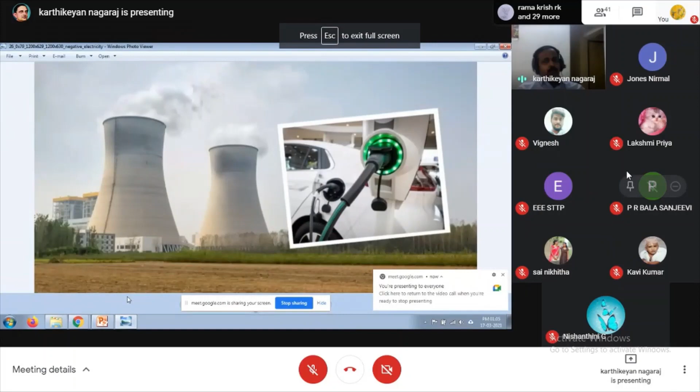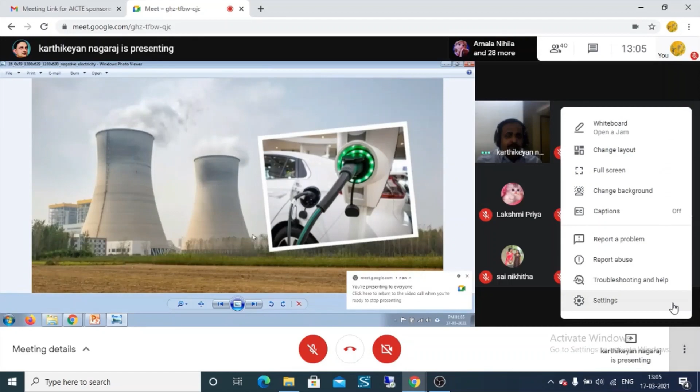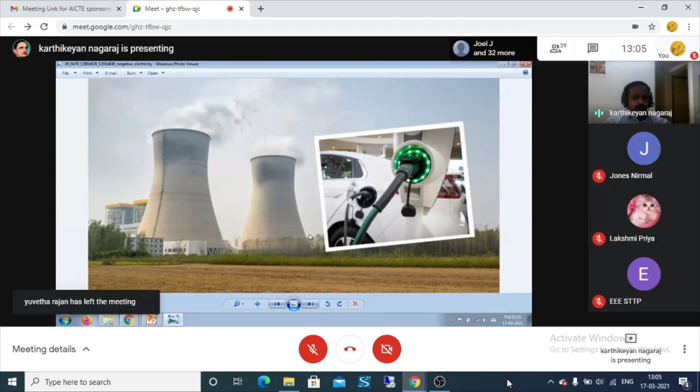So, electrical vehicles - what's the purpose of us moving to electrical vehicles today? It's not fully satisfactory because till now we are consuming power indirectly from non-renewable resources. People who are buying electrical vehicles eagerly explain that we are contributing to pollution control and sustainable development, but they are indirectly contributing to the enhancement of burning of non-renewable energy. So we must consider why we are going for electrical vehicles. This is the main thing.

Some people think the electrical vehicle is a new thing for our era, a new thing for our generation. But that is not true. The race started for both gasoline vehicles and electrical vehicles at the beginning. But temporarily, the normal vehicle, the IC engine vehicle, led in the competition. Till today they have the leading role in transportation, but the race started from the beginning. Both vehicles were on the same platform to start their life, but temporarily, for nearly 100 years, the electrical vehicle went back.

But today, a new type of lifestyle is going to come - the electrical vehicle era. So let me show one introduction video - how the electrical vehicle first dominated life, then temporarily was not able to dominate transportation, and finally how it returned back to the competition. Let me show one simple introduction video.

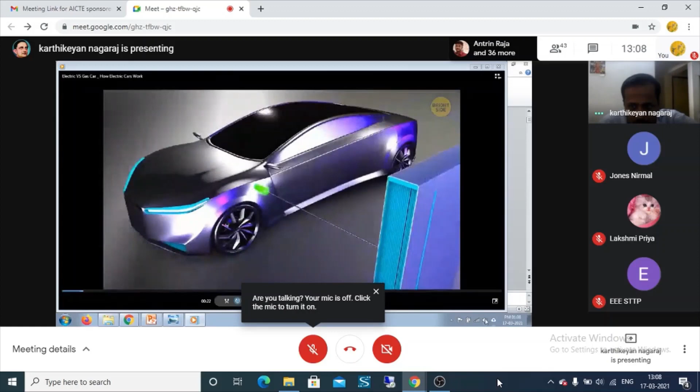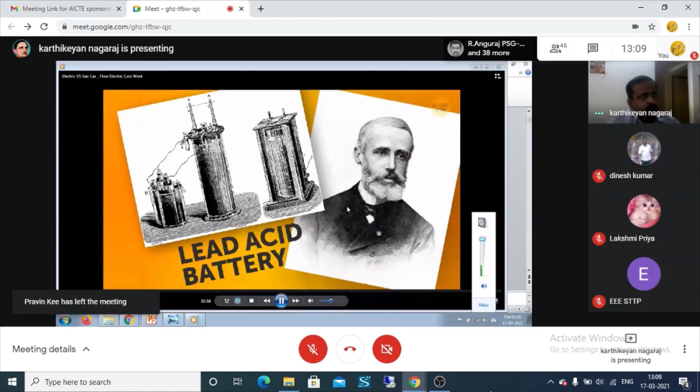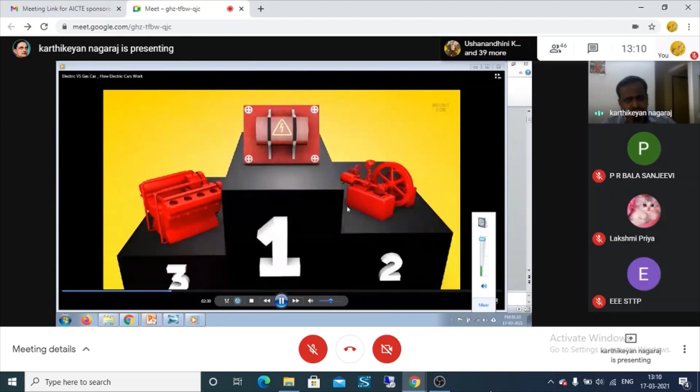You'd probably be surprised, as I was, to find out that electric cars aren't a 21st century invention. Electric-powered motors came out at pretty much the same time as petroleum-driven engines that run on fossil fuels like gas and diesel. Almost 2 centuries ago, in 1828, a Hungarian engineer named Anyos Jedlik invented the first prototype of the electric motor and used it to power a small model car. In 1834, blacksmith Thomas Davenport created a similar device that could be driven short distances using an electric track - think streetcars later on. In the Netherlands, university professor Sibrandus Stratingh built a tiny electric car powered with non-rechargeable batteries. Even though the idea of a battery-powered vehicle was to revolutionize people's lives, primary cell batteries weren't the way to go since they needed too many batteries to run the motor over long distances at low speeds. In 1859, French physicist Gaston Plante invented the lead-acid battery, which changed the electric engine game for good. Many countries began producing electric three-wheeled cars until the U.S. made a breakthrough: in 1891 they created the first electric vehicle, a 6-passenger wagon that could go up to 14 miles per hour - major back then. After that, people were thrilled and the electric car market thrived. In the late 1890s, electric-powered taxis filled the streets of London. At that time, electric cars had many advantages over steam-powered and gas-guzzling engines: they didn't vibrate, didn't give off that awful burning gasoline smell, and didn't require much effort to start. By the early 1900s, almost 1/3 of cars in the U.S. were electric-powered.

But that wasn't going to last for long. By the late 1920s, infrastructure in the U.S. had improved significantly, and vehicles needed to go further more efficiently. So fossil fuel cars took the lead because they got the job done.

The top speed that electric cars could achieve was 15 to 20 miles per hour, about how fast you can go pedaling on your bike. Another problem was that electric-powered engines back then could only travel 30 to 40 miles on one go, which means they'd need charging every couple of hours.

And things were about to take a turn for the worse, along with the improvement in infrastructure. That's when the electric starter was invented, and gasoline cars began using it alongside mufflers, which made their noise a lot more tolerable. Electric cars took their final hit in 1910, when Henry Ford began his mass production of gas-powered vehicles, which made them ridiculously cheap, whereas electric cars cost a lot more.

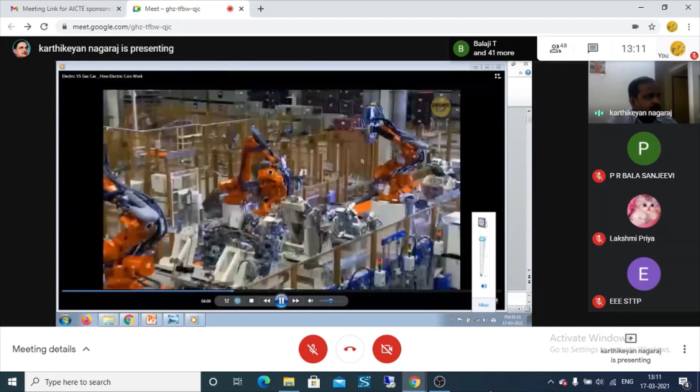Companies then realized that there was no room for electric automobiles on the market, so they stopped producing them altogether. Fast forward to the 21st century. We now have advancements in technology and a greater concern for the environment. Add a fear of running out of resources to fuel our vehicles, and it's no wonder automotive companies have decided to give electric cars another chance.

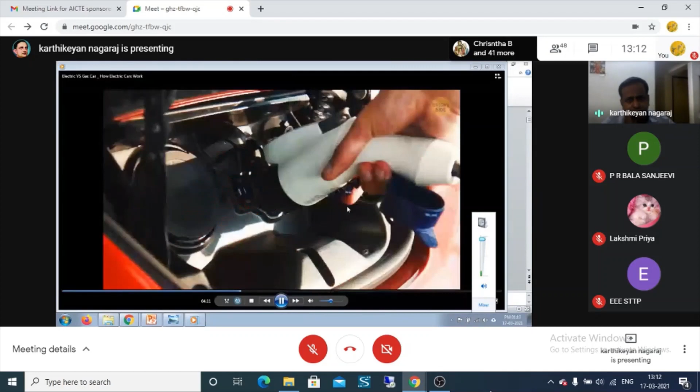The main difference between electric and fossil-fueled cars is that the e-cars can use a variety of renewable resources to generate their electricity. In fact, the science behind the electric car is surprisingly simple. Its basic principle is the alternating current, for which we have Nikola Tesla to thank more than a century ago.

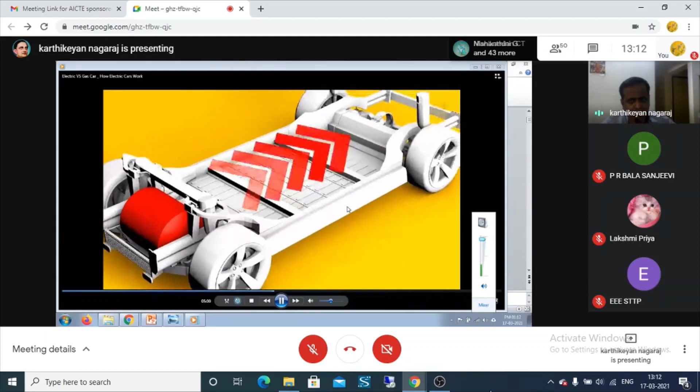Before you understand the science behind that, let's back up and first cover the differences between direct and alternating currents. That's DC and AC for short, or AC/DC if you're into hard rock. An electric current is the movement of an electric charge that carries electrons. An engine, for example, can be powered by direct current, which means that the electrons flow in one direction only. For most things that run on DC, that's from the battery to whatever it's powering.

The electrons that move along an alternating current, on the other hand, periodically and consistently change direction. It's pretty much all the electric power in your home, from your microwave to your game console. In short, if you could look at the two types of current on a graph, direct would be a flat line, and alternating would have regular uniform waves going up and down. Or to put it even more simply, DC would be like water running out of a bucket with a hole in the bottom. AC would be kind of like watching the water swish around back and forth if you open the lid of your washer and look inside.

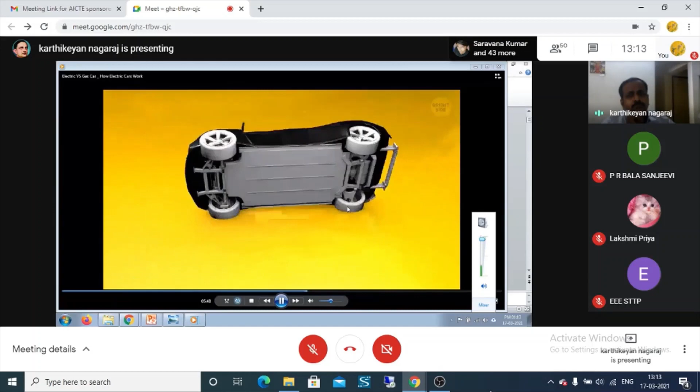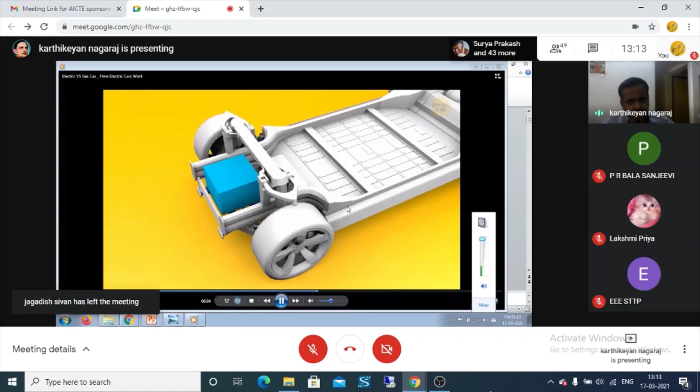Okay, enough of that. So what about electric cars specifically? Well, most of them convert the direct current electricity from the batteries into an alternating current. Since electric cars don't have an internal combustion engine like gas-powered vehicles do, they use their space quite differently. You'd normally expect a big, bulky battery to be in the front under the hood, but it's completely different in electric cars. They have 7,000 lithium-ion batteries that sit under the flooring.

This battery pack has a longer lifespan and a higher power density, which makes them ideal for powering a vehicle. But one of their vulnerabilities is overheating and thermal breakdown. That's why electric cars have coolant running between them to prevent overheating.

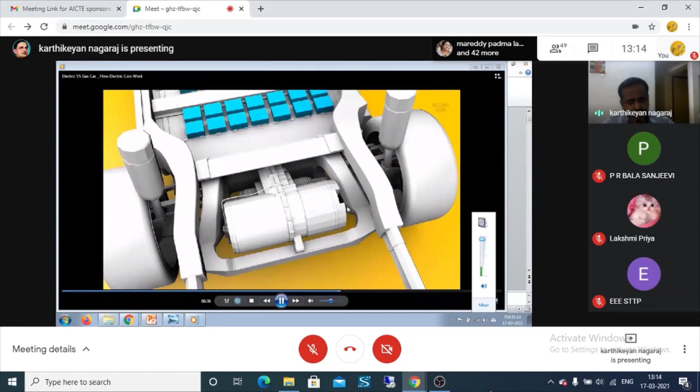And there's all kinds of interesting stuff at the back of the car. That's where you'll find the inverter, which is what converts that DC into AC and gives power to the engine. But it can't do that without the induction motor. It's also in the back, and it takes the alternating current that just came from the inverter and creates a rotating magnetic field that causes the motor to turn.

Now, electric cars don't have a gearbox or lever, and all of them are automatic. They have a single-speed transmission that sends power from the induction motor to the wheels. This is how the electric motor transforms electrical energy into mechanical energy, that is, the physical power that turns the wheels and sends you on your way.

But here's where it gets even more interesting. When you accelerate while driving, the car uses more energy. But when you brake, the energy is transformed into electricity through the induction motor. Then, that electricity travels all the way back to the battery pack and is stored so you can use it later.

Now that's efficient. An electric car gets juiced up by being plugged into an outlet or a charging station, and they use 3 main levels of charging. The first level is the basic charging you can do at home. It uses an outlet of 120 volts and adds 2 to 5 miles of charging per hour.

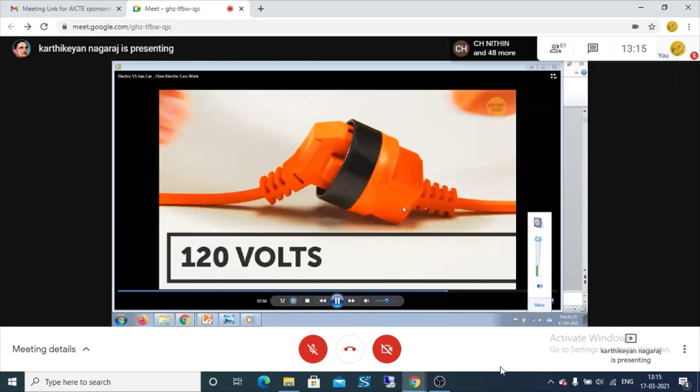Then there's the second level. It uses electric vehicle supply equipment and has a higher voltage, 220 to 240 volts, to add 10 to 25 miles per hour of charging.

Finally, the third and most efficient one is the direct current charging station, which does exactly what it says. It uses direct current to add up to 80% of the car's battery storage in less than half an hour.

The cost of charging an electric car is dirt cheap as well. It'll cost you less than $5 to fully charge your electric vehicle at home, and you can get up to 150 miles on one charge. That, of course, depends on the size of the battery. Bigger electric cars with bigger batteries can cost up to $15 to fully charge, but they can cover up to 300 miles. Ooh, where do I sign?

Now, electric cars are less expensive to run and maintain if we compare them to fuel-powered vehicles. But there's no denying that the car itself comes with a much higher price tag. But still, according to a recent study, the average operating cost of an electric car is $485 a year, whereas a fossil fuel automobile is $1,117. So that higher initial price should pay itself off over time.

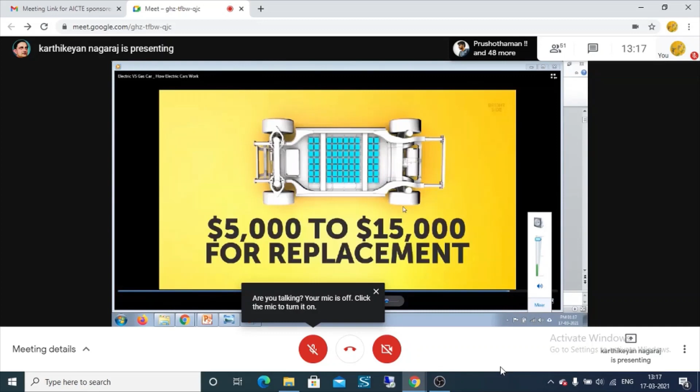But there's still another problem. One of the most expensive components of the electric car is its battery pack. It'll cost you an arm and a leg to replace it if it breaks down. Expect anywhere from $5,000 to $15,000 for replacement. But most electric car manufacturers give the battery at least an 8-year warranty for up to 100,000 miles, if that makes you feel any better about purchasing.

The good news is that we're seeing a huge movement toward electric-powered vehicles as a strategy to tackle fuel emissions and reduce pollution. The head of automotive research in Europe predicts that by 2025, all cars in Europe will be totally electric or at least hybrid. And many countries are setting goals to lower their fuel emissions in the next few years. So, who knows? Maybe sooner than later, we'll all be zipping around in electric cars and gas guzzlers really will be a thing of the past.

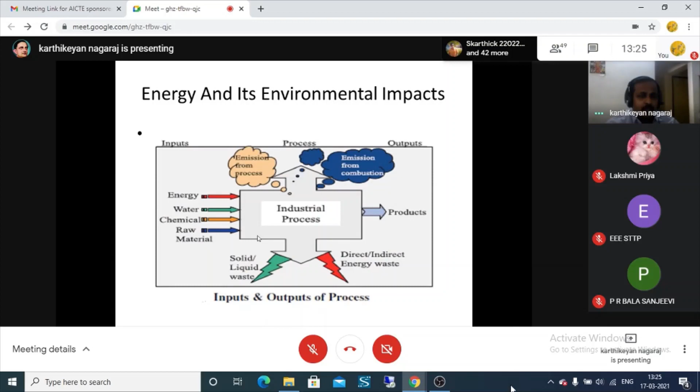So the greenhouse effect - this is only because of burning fossil fuel. While burning fossil fuel, ultimately we emit sulfur. Did you imagine I am using an electric vehicle? Then there is no emission. But the problem is that while using an electric vehicle, you charge it.

The EV charging generates electricity from coal. While burning coal, ultimately sulfur comes out, and the sulfur affects the atmosphere. Due to that, a high amount of carbon dioxide and carbon monoxide is emitted, particularly from transportation vehicles.

Yes, because most people today use either public or private transport, and they use fossil fuels. Burning fossil fuel emits carbon monoxide. The amount is high because in the city side, the density of vehicles is very high, but in rural outer areas it's different.

The roads are very low there, that's why the density of vehicles is very low. Due to that, it dissolves in the atmosphere. But in the urban area, in the dense city, we have a greater number of vehicles which give off carbon monoxide that affects the total environment. Due to that, we have more greenhouse gas emission and high carbon.

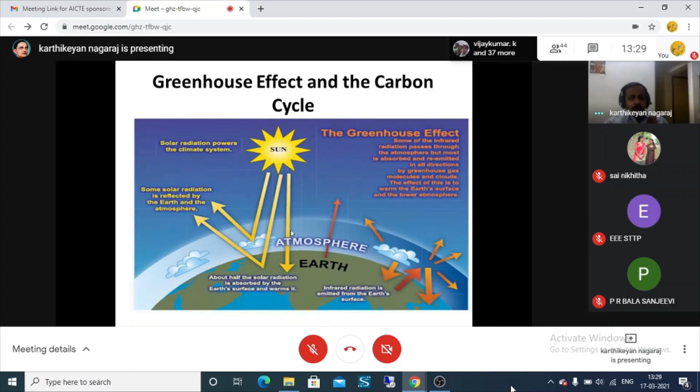Due to that, the government have promised to reduce carbon emission and increase oxygen production. There is only one country which has a good carbon rating, that is Bhutan, our friendly nation. Bhutan has very low carbon emission because it is a small country. They did not bother about GDP. They are not a democratic country, it's a king-ruling country, so they are interested in people's happiness rating. So they did not include such industries in their country. Due to that, they have less carbon emission, so Bhutan has a good carbon rating.

So ultimately, while we are using normal electrical generation from coal, that will lead to acid rain formation, because while burning coal, it produces sulfur dioxide. Once it mingles with H2O, we get H2SO4, a kind of acid, sulfuric acid. The percentage of sulfuric acid present in rain is very low, only 0.01%, but that will damage the pH value of the soil.

Every soil has a pH value. Once it reaches the acidity level, it will damage the microorganisms. Once the microorganisms are reduced, the plant cannot get nitrogen. Due to that, the growth of the plant will be reduced. So this is not directly reflected in life, but slowly it will show the result.

Global environmental concern: due to the rise of high amounts of carbon dioxide, carbon dioxide has the characteristic of absorbing heat from the sun. So it also increases our atmospheric temperature. Due to that, we have more environmental impact.

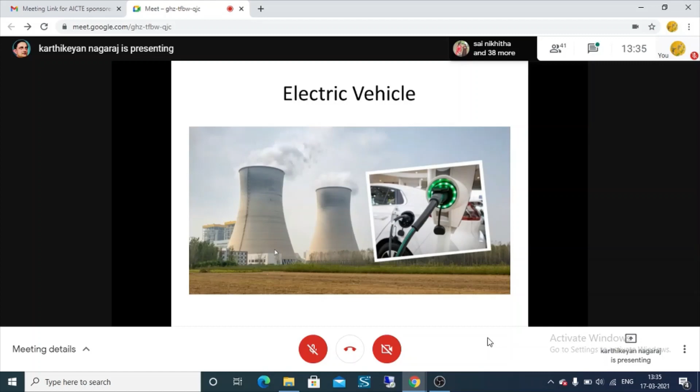So then fuel cells. Moving to fuel cells is also one of the methods, but we are still going through fossil fuel, because today the hydrogen generated is mostly 80 to 90% from fossil fuel, especially natural gas. Natural gas is nothing but methane dug from the ground, a combination of hydrocarbons. They extract hydrogen from the hydrocarbon and store it in the tank.

So due to that, they are extracting hydrogen from hydrocarbon, and the balance is carbon dioxide. So ultimately no goal is achieved, because industries are releasing tons and tons of carbon to the atmosphere by separating the hydrogen. Some countries are planning to dig the carbon dioxide into the deep sea, but it is not an economic solution.

So for the fuel cell vehicle, it is one of the well-advertised vehicles, competed by many companies. But the problem is, what is the current scenario? How much hydrogen is produced from renewable sources? We can segregate that - the hydrogen generated from renewable energy is nearly 4% only.

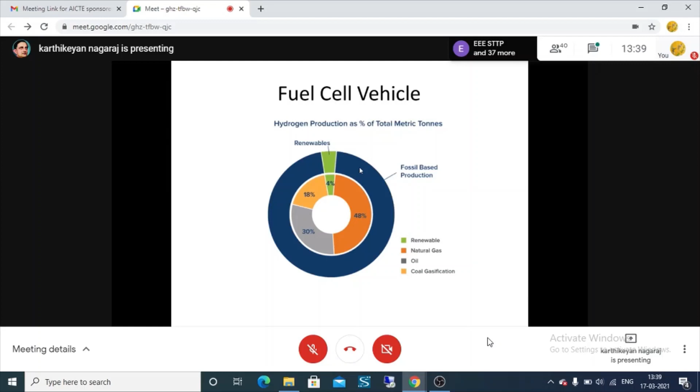From electrolysis or other methods, it is not economic. Hydrogen production from non-renewable energy is economic today. Hydrogen production is not a new thing for our community - they are producing more hydrogen for fertilizers, especially ammonium and some resins.

What is the purpose of ammonium? It is the main product, the main fertilizer for crops. Another thing is strengthening of steels - by pumping hydrogen, we are strengthening steels, and it is used for annealing and forming gas.

Another important use of hydrogen is in power generation stations. Hydrogen cooling is one of the important methods for efficient cooling. Even though it may be dangerous, it is a very efficient cooling method. Previously we used demineralized water. Then general industries like semiconductor industries, propellant fuel and gas production, glass production, hydro generation, and cooling of generators.

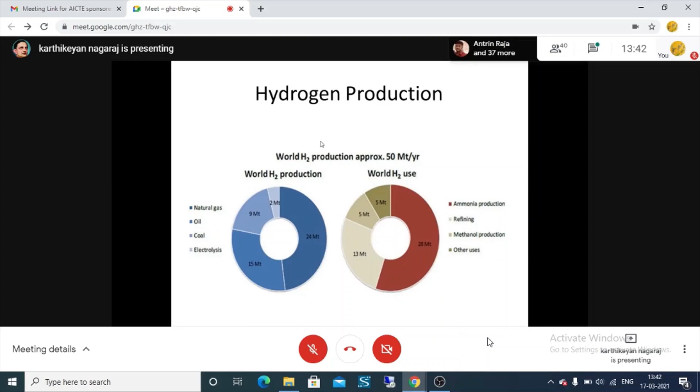Then today's scenario of hydrogen usage - more than 28 million tons of hydrogen is used for producing ammonia, 13 is for refining, 5 is for methanol production, and other uses, only transportation will occur.

So which type of hydrogen production is good for the environment? Once the power is produced from renewable energy sources - that is by using wind energy conversion, another thing solar power generation - then using the electrolysis method, power electrolysis method, and producing hydrogen.

So some people ask why India did not implement this method, because of the surplus production of power. Some countries have high installed capacity of renewable energy - for example, they required only 5 megawatts of energy, but they installed 10 megawatts in the solar panel. That country can have 5 megawatts of surplus energy in production.

At that time, they can move towards hydrogen production by using that surplus energy. In India, surplus is not a word used particularly in power generation. We did not move to that concept, because till now we are producing under our requirements, nearly under our requirements. So once we reach a surplus amount of power by using renewable energy, then only we can think about conversion.

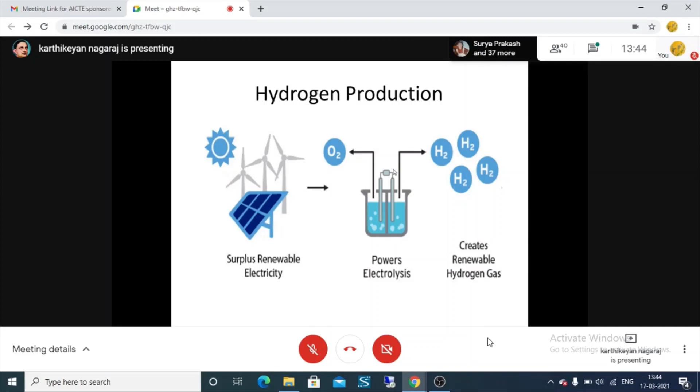Then the supercapacitor. The supercapacitor is one type of capacitor, but the thing is, supercapacitors have high energy density. Compared to the normal capacitor, it has high energy density, high power density, high capacitance, and a longer life. So here I'd like to include one thing.

In our college, our students are implementing solar operated vehicles. They are using an electric motor to run the vehicle, and ultimately we have regenerative braking. The regenerative braking occurs for a short time. We are using a lead acid battery, and the charging speed of the lead acid battery is not so high, so we cannot harvest the power generated from that regenerative braking.

So the students are implementing a capacitor as temporary storage. We estimate the power generated in the regenerative braking, and it stores the energy temporarily in a high storing capacity capacitor. After that, the DC to DC converter will slowly charge the lead acid battery. Due to that, they are able to consume the power from the regenerative braking, even though I am using slow charging batteries. So this is a temporary solution.

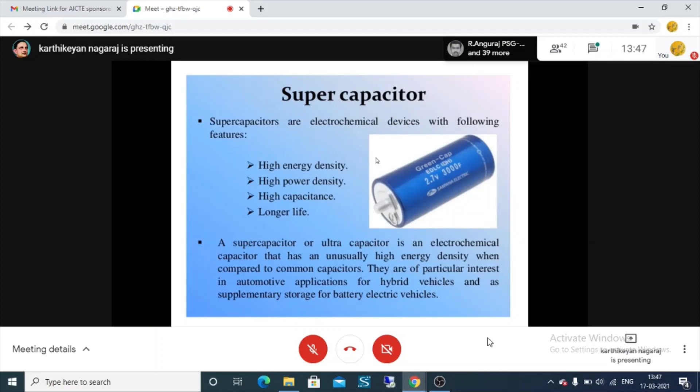So we are moving towards supercapacitors, which have high energy density, high power density, high capacitance, and longer life. The supercapacitor is otherwise called an ultra capacitor. It is normal like a capacitor, but the thing is, it has high energy density.

The world is not only going along with lithium ion batteries, they are also researching the ultra capacitor. Once the ultra capacitor is successfully installed in electrical vehicles, and the cost comes under the normal range, the world will simply drop lithium ion batteries and move towards the ultra capacitor. Because if that happens, it becomes like our normal fossil fuel, petrol or diesel vehicle — however many units you require, they simply charge your vehicle very fast.

So these are the things we have discussed. Now let me move to why we are looking at the electrical vehicle. Because our motto is to charge the electrical vehicle by using solar — that is our main motto.

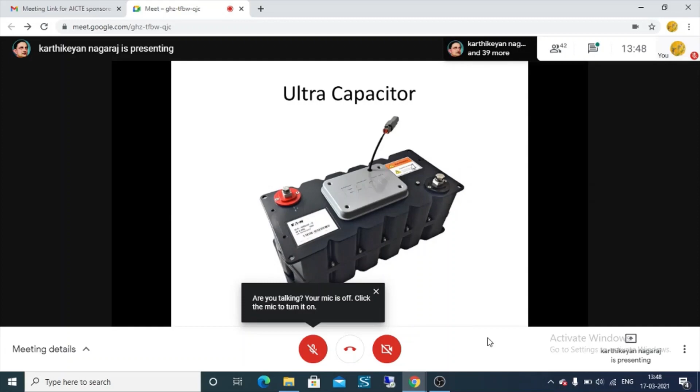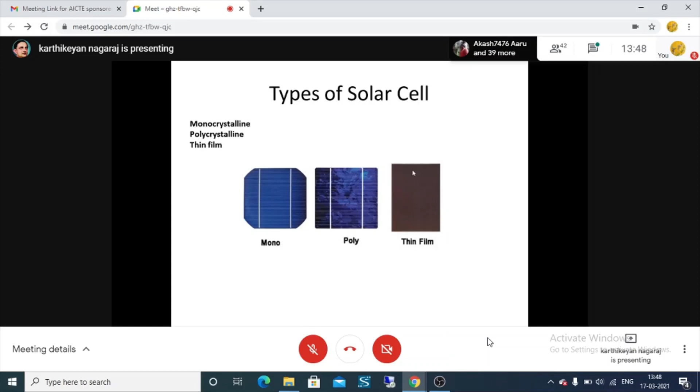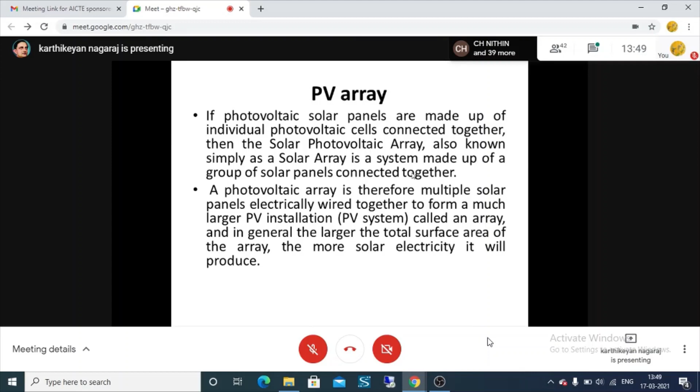A single cell produces a small voltage, but in the panel we have a series-parallel combination of PV cells that produces one normal voltage — it may be 12 volts or 6 volts with 1 amp. This is connected in series-parallel combination as a PV array, so we get a high amount of voltage with the required current rating. In our topic, let's imagine a 17 or 18 kilowatt-hour solar panel for charging the electrical vehicle.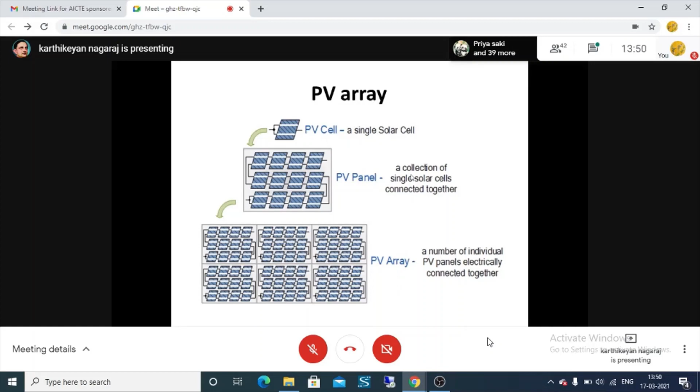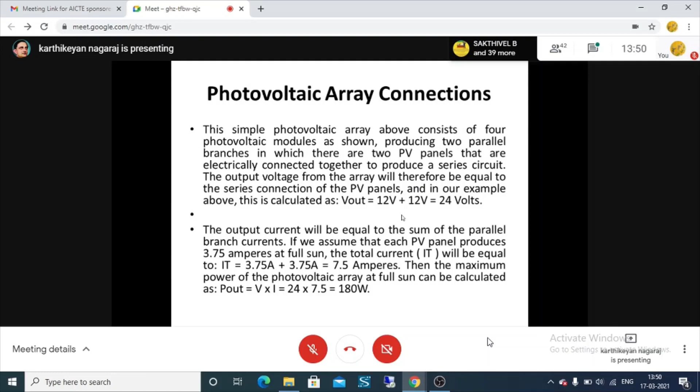So connections. When you connect in series, the voltage will ultimately be increased, same like your batteries. For example, we are using normal mercury batteries, that means 1.5 volt. When connected in series, the voltage is doubled or added. While connecting in parallel, the current will be increased.

For the photovoltaic array connections, we require 24 volt, and for the current rating, if we need a high amount of current, we increase the parallel strings. While we increase the series strings, the voltage starts to increase. Increasing the parallel strings means the current starts to increase.

So the problem is, we are using 4 different panels in 4 different places. For example, if a bird is sitting on one panel, what will happen? A bird, nearby obstacles, a high amount of dust particles, or a shadow of a nearby tree falling on one particular solar panel - what will happen?

Because due to the fall of shadow, which may happen for any reason, the voltage will be reduced. Once the voltage is reduced, it will ultimately reduce the internal resistance and internal current flow, but it will affect the rest.

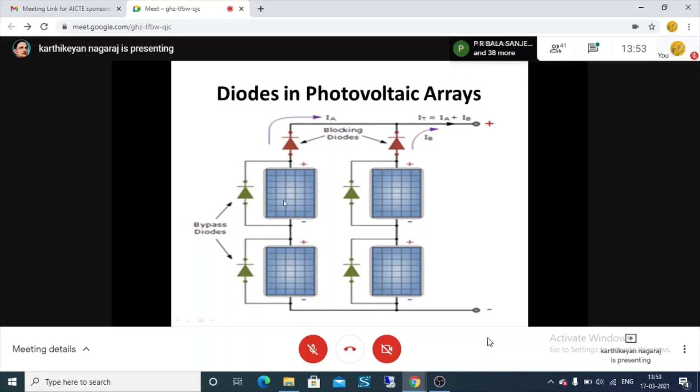That can be eliminated by using a diode - a bypass diode. Suppose this panel has proper sunlight, there is no issue. If the panel is not able to get proper sunlight, at that time the bypass diode will secure the panel by bypassing the current through the circuit. So that is the bypass diode.

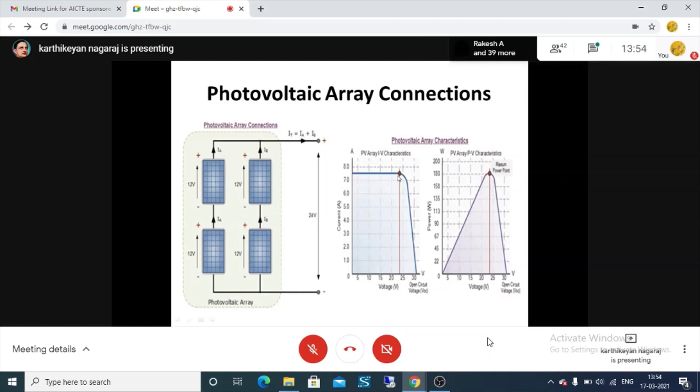So we are interested in harvesting more power. How to track more power? Here we have the PV, that is photovoltaic array characteristics. First we must take the IV characteristics and PV characteristics. The higher point is taken as the maximum power point area, so we get the term called MPPT, maximum power point tracking. This is an algorithm to get the maximum amount of voltage and current from the particular solar panel under all conditions - that is MPPT, maximum power point tracking in the photovoltaic system.

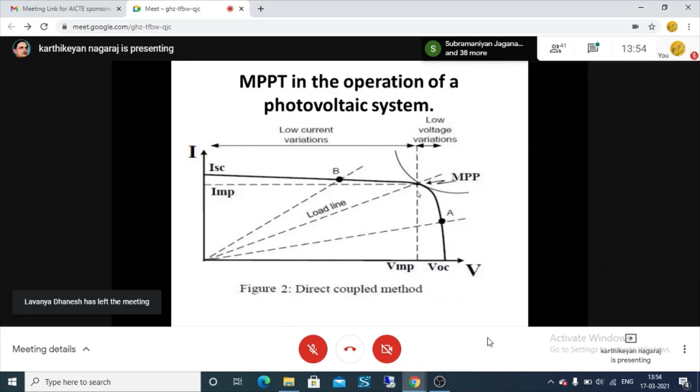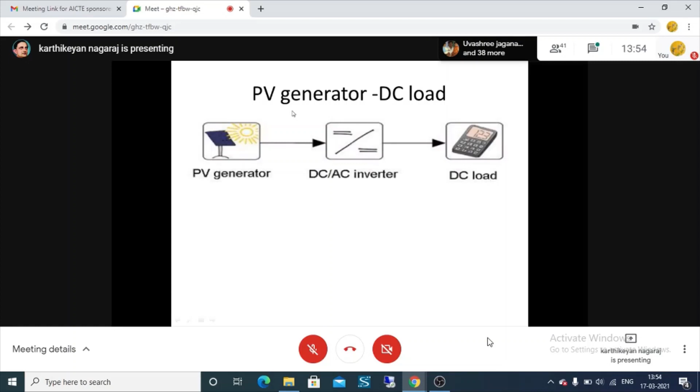So we have different applications, let me imagine. Here we have a PV generator producing power from the sun, and it is given to the DC to DC converter, then given to the load - here the load is the electric vehicle. Otherwise, the PV generator is given to the inverter and then to the AC load. So AC load is also a vehicle, because today the electric vehicle can accept low voltage AC, high voltage AC, and direct current.

For example, in our home, in India, we have a home voltage of 230 volts. So it accepts the AC voltage and converts it into DC, then it is given to the charger circuits. In the charging stations, when you go to the charging stations, the station has high power capacity converters, which can manage high power charging current.

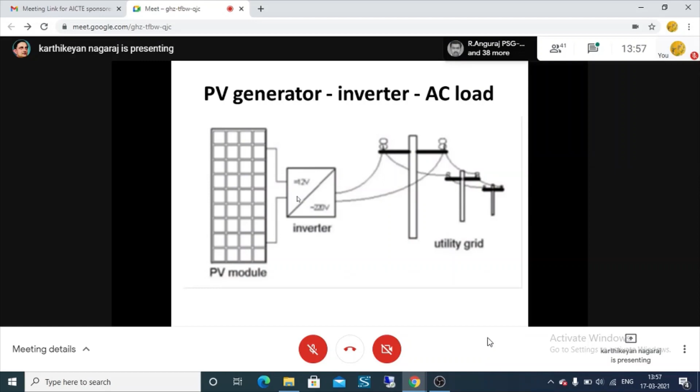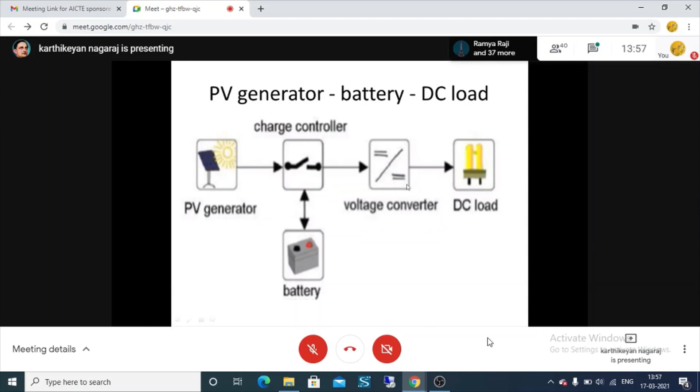So here the AC load is also used as fuel in an electric vehicle. So we are using batteries. Here we have the PV generators, and here we have the station, we have temporary batteries. Then it is converted and given to the DC load, that is the electric vehicle.

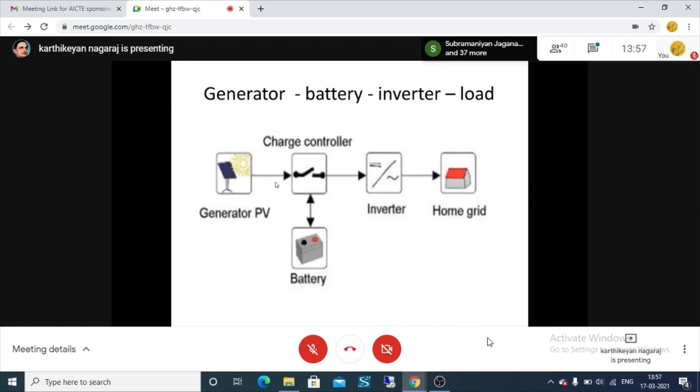Suppose the generated power is more than our consumption. It is given to the home grid.

So come to our main purpose, the solar carport. This is nothing but a solar panel used on the roof of our carport. This method is applicable for a person who has a car for transportation from home to their working company.

That is our consumer. I am not discussing commercial vehicle owners. I am the person using the electrical vehicle. I have one home and I have parking space at the company, so I am talking about that small group of people. I am not discussing commercial people.

For example, call taxis or commercial transport vehicles like buses - this thing I am not discussing. I am a person, I have one electrical car, I have a home, I have parking, and I use the electrical vehicle to travel to my office, and the office also has a park. There I am implementing the solar carport.

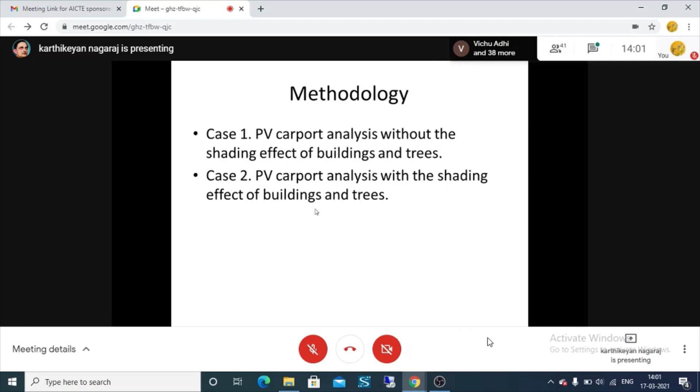Then case 1: let me take 17.3 kilowatt power as a solar panel available for calculation purpose. Here we are using 54 photovoltaic modules used in MATLAB at 180 degrees for the sun rising angle - that is, an azimuth angle facing south and a 30 degree slope angle according to the geographical location. This value is taken to get more power in our campus.

So case 1, this is 17.3 kilowatt power - how can we implement this in MATLAB? Because we are taking the sunlight level using a lux meter, every day they take the value using the lux meter, and from that we calculate the irradiation level. While implementing the irradiation level in MATLAB, we get the output power.

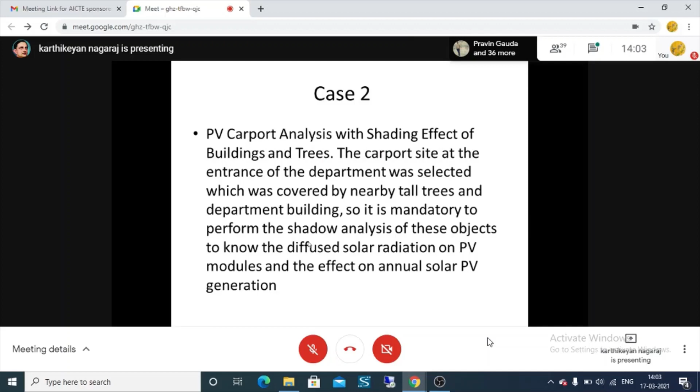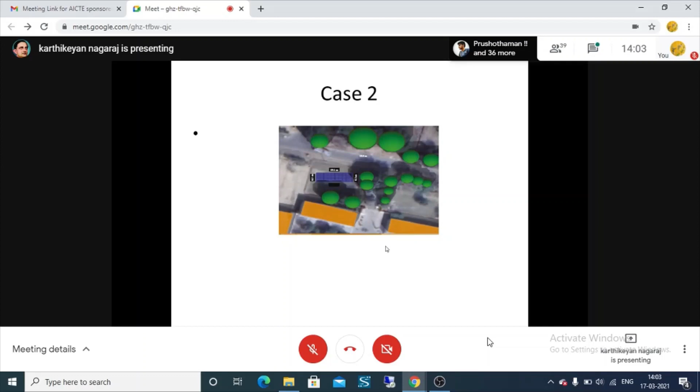So case 2, with the shading effect - ultimately we have a difference. This is just an imagination, due to the shading of buildings and trees nearby.

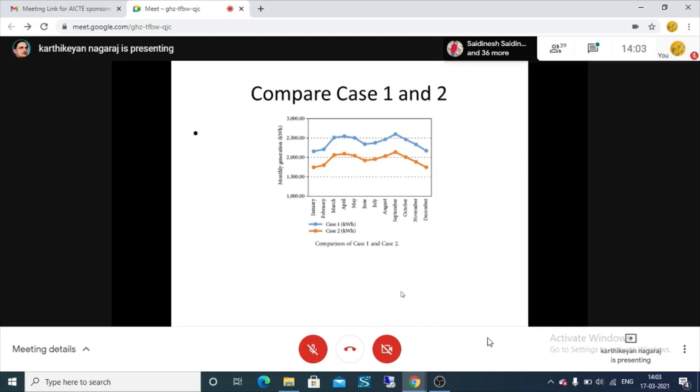Due to that, we can understand case 1 has a leading role, but it is not practically available, because the car parking present in the office may escape case 2, but in our home, ultimately trees and building shadows may fall on the roof.

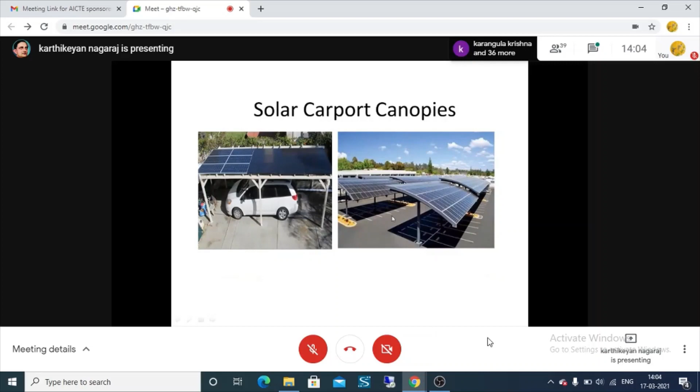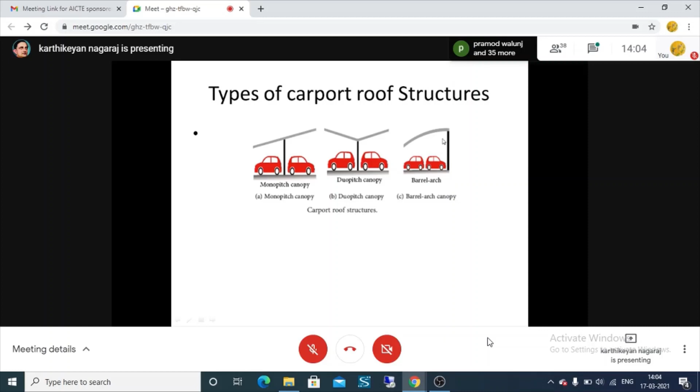So types of carport - we have 3 different carports: mono pitch, duo pitch, and barrel arch. The barrel arch we have already seen. Mono pitch and duo pitch are quite good compared to the barrel arch. For the barrel arch, we need to order a separately designed solar panel.

So we compare this with duo pitch. This is also lightly similar to the duo pitch, and this also gets our output. We compare the 3 things, and mono pitch is the efficient one when compared to the other designs.

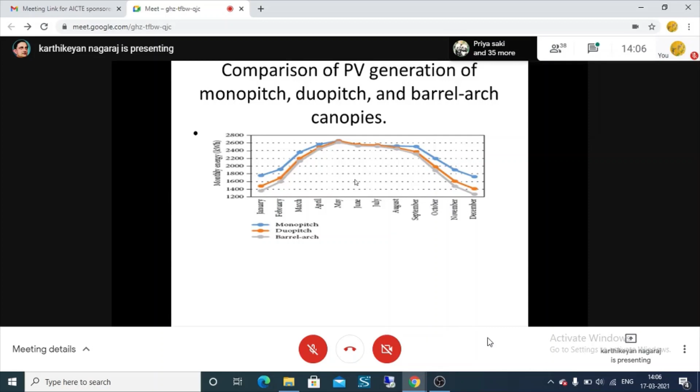Mono pitch is nothing but using slanting. The main advantage is that the heat absorbed from the sunlight is also escaped due to the slant construction, so the heat goes out naturally.

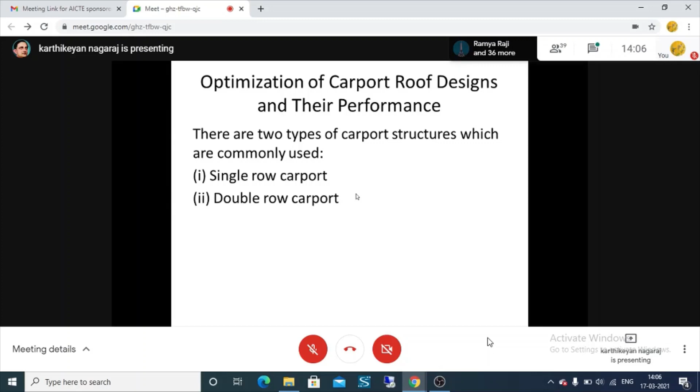Another thing is which type of carport roof design is preferred: single row car roof or double row. Double row is the efficient one because compared to the single roof, in the double roof we are using only a single pillar.

So for configuration of the PV standalone, we are using mono or duo or barrel type or barrel-arch type. The panel is producing the electrical energy, and that electrical energy is converted by the DC to DC converter, then it is given to the control center.

The purpose of the control center is to charge the electrical vehicle, using the balance power. Suppose I designed my panel to charge 3 vehicles at a time, but after some time there is no vehicle available, for example only one vehicle is available at the charging station. Now the balance power is returned back to the supply.

Second thing, suppose it is a morning period or a cloudy time in the sunny region. Due to that, the solar panel cannot effectively produce electric power. So at that time, the power is harvested from the grid and given to the control center, which then charges the electrical vehicle.

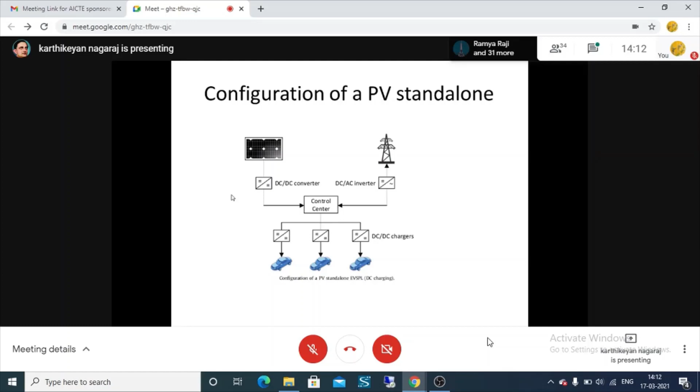That's why my journey is completely emission free. I am eagerly saying that I am not producing any harmful gases to the atmosphere, I am not producing smoke, because I am charging at both ends using clean energy, that is solar. So in this method only, we can say that the electrical vehicle is clean energy.

So the MPPT algorithm is used to help produce the highly efficient output. Let me move to the next step.

In Tamil Nadu government, there is an EB policy: if you are producing renewable energy sources, for example wind energy conversion system, but I have load in Chennai. Chennai is not a place for producing wind energy, but I am interested in renewable energy power generation. So you can install the renewable energy plant in Kayathar or in the south region like Kanyakumari. I installed 5 megawatt of wind power conversion system in Kayathar, and connected this into the grid.

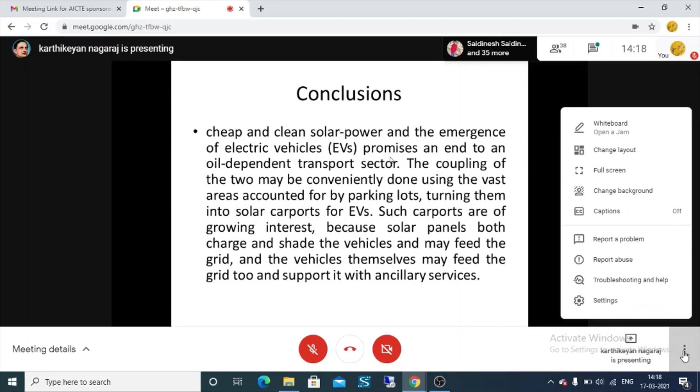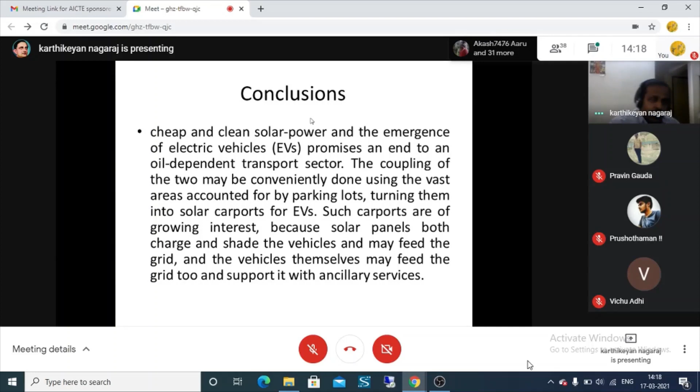Once you charge the electrical vehicle using the solar panel, it will reduce oil dependency, and conveniently use the vast area for turning them into a solar carport for electrical vehicles. Such carports are growing interest because the solar panel both charges and shades the vehicle and may feed the grid, and the vehicle itself may feed the grid too and support it, giving importance to our life.